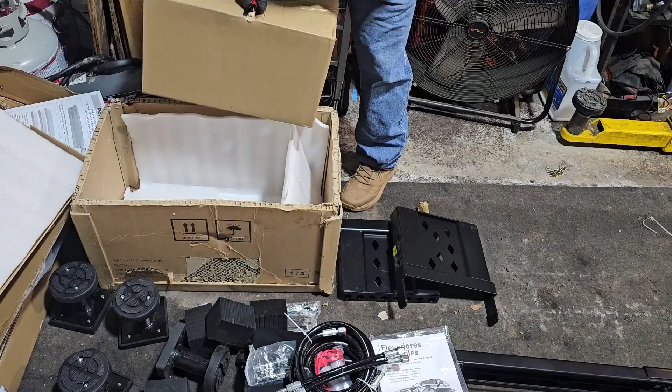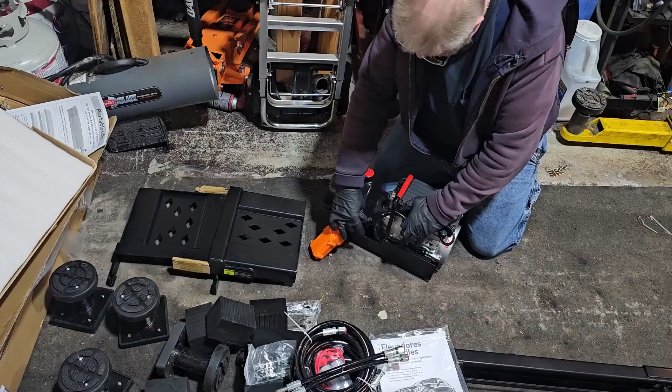So very cool. So this is your pump controller, your hydraulic controller. Looks like that is in there pretty good. So pretty decent cord. So that's basically your up and your down button, and then these are your hydraulic connections here.

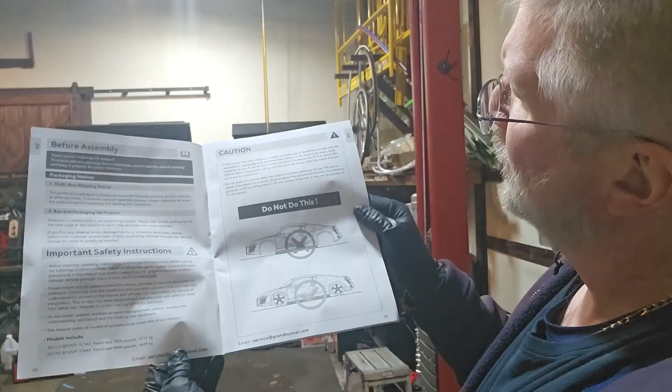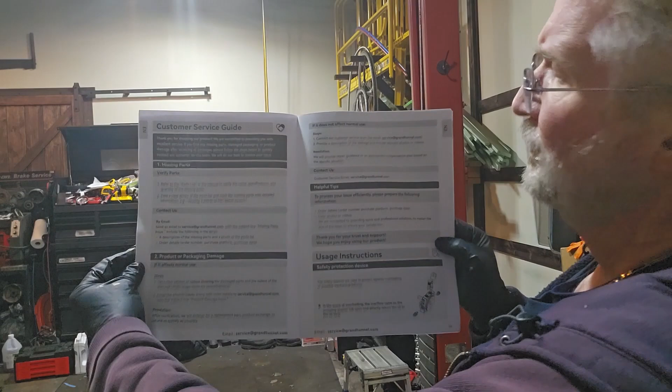And then here's your instruction manual. Okay, so that is your instruction manual. So give you an idea, we go page by page. So safety instructions. Customer service guide, helpful hints.

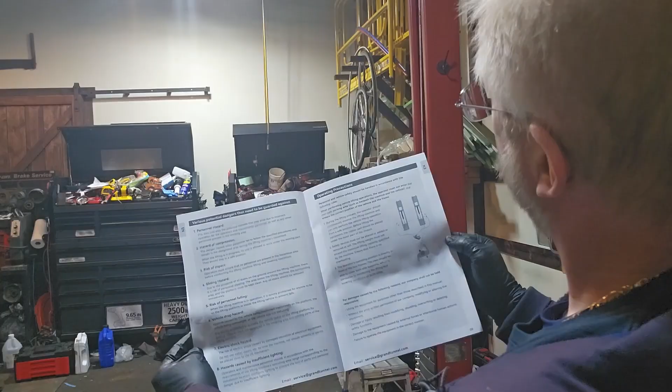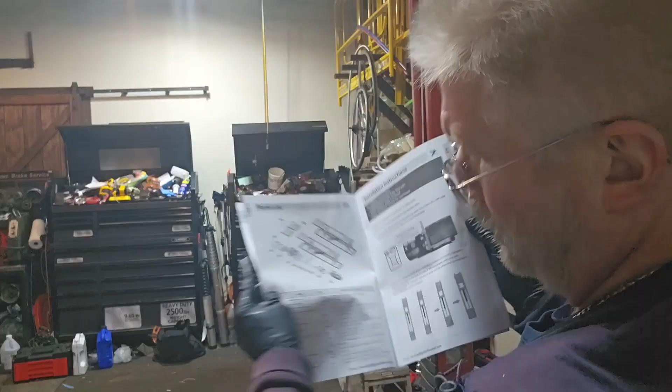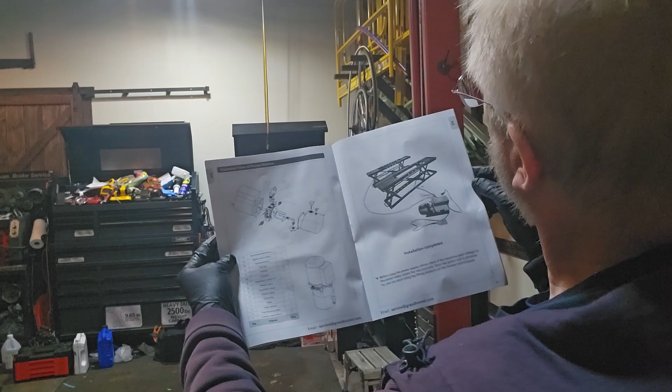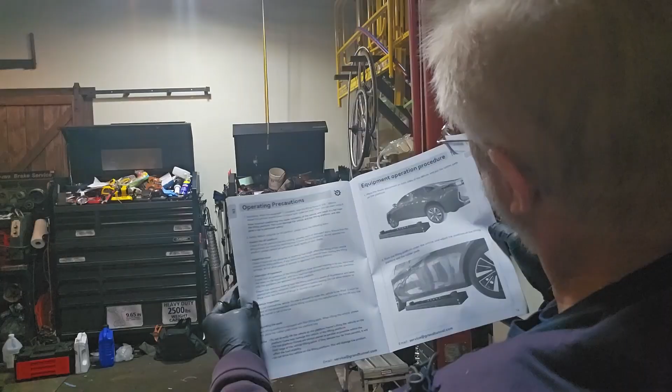Then it kind of gives you quick how-to, operating precautions. Obviously, you want to read through this because there is a lot to this. How to set up the pump, how to set up the hydraulics. So obviously you don't drive the vehicle over these, you position them underneath.

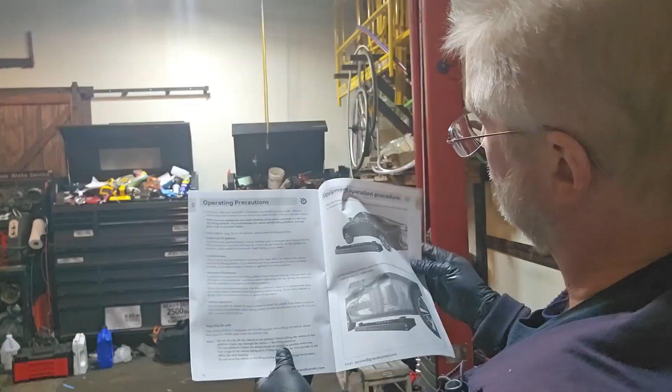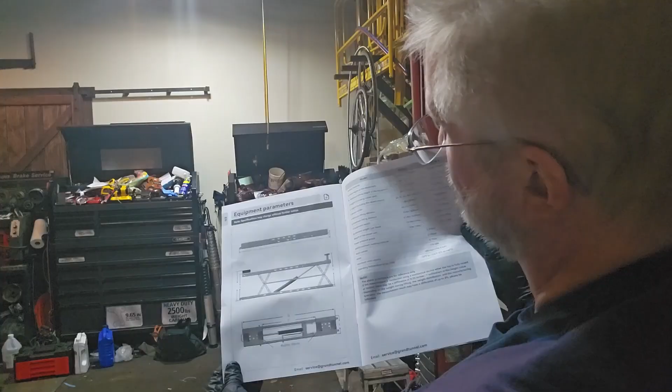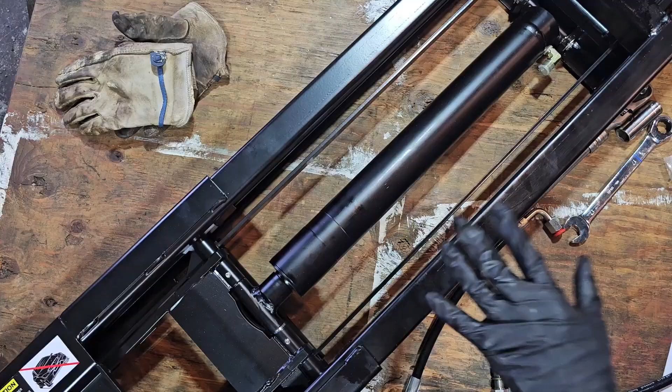So those are your connection points, hooking everything up to the pump. And then basically how that will lift. So there you go. So let's start hooking the hydraulics up. So I put the car lift on my lift table so we can get some better views of this, and hopefully I won't jockey the camera too much by bumping into it, but we shall see.

So you have this hydraulic line. So this will attach to your piston end over here. So hopefully you can kind of see that clearly enough. So what we are doing is we are going to be disconnecting this line and then this line protector on this side. So we're basically going to have that ready to go. And then you're going to need this little pass-through gizmo.

So I put this little washer on. It seems like it comes with 4 washers, so you're going to be looking for all 4 of them. This will only take 2. Oh, and on this end, this bolt is kind of like welded on or fitted on or whatever you want to call it. So basically we're going to take the one washer, put it on like that. Now you have a pass-through hole here. I'll show you at the end what it looks like, but just kind of give you an idea.

And it's kind of tight here because you have this section of the lift in there, but you're going to slide on the other washer, which I'm doing my best to get in there with my fingers as it keeps slipping up my hand. Okay, so that goes in there. Now we're going to basically put this other nut onto this pass-through bolt. And again, they are pass-through bolts, so you don't want to torque them down too tight, but you want to make them snug. So I'm doing this by hand.

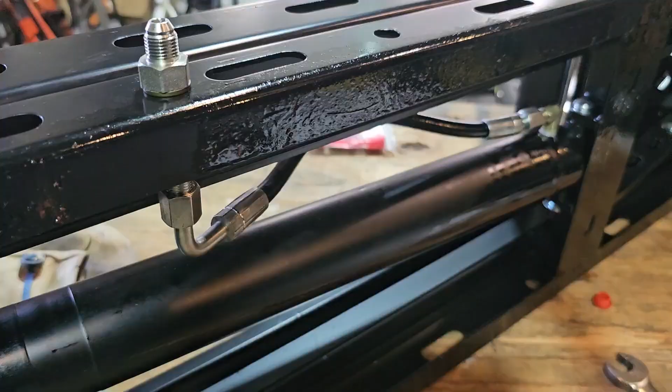Okay, so we can get a little bit better access down here. So we're going to keep this end as straight as we can, so when we're tightening this down, it'll make a good pressure fit. Okay, again, we're going to make it snug and check for leaks, but I think we'll be okay there. Okay, so that's nice and snug there. Let's get this shored up a little bit better in here. Okay, I think we're going to use that.

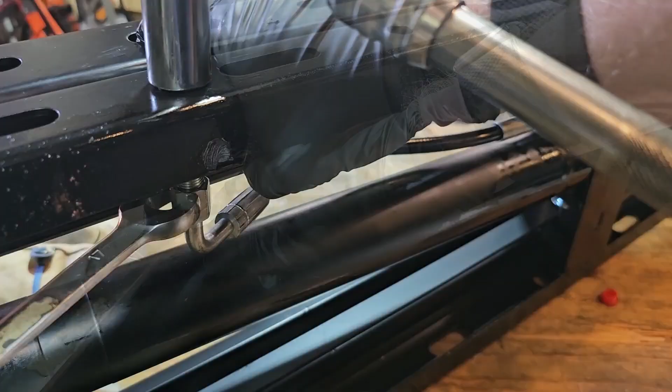And then just kind of get my socket there, my wrist holding that, so we got a nice good fit. Torqued it down pretty good. Okay, so that seems okay. Like I said, we'll test it for leaks once we hook everything up.

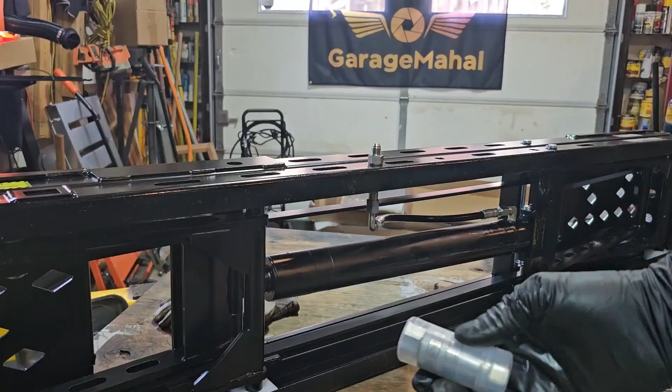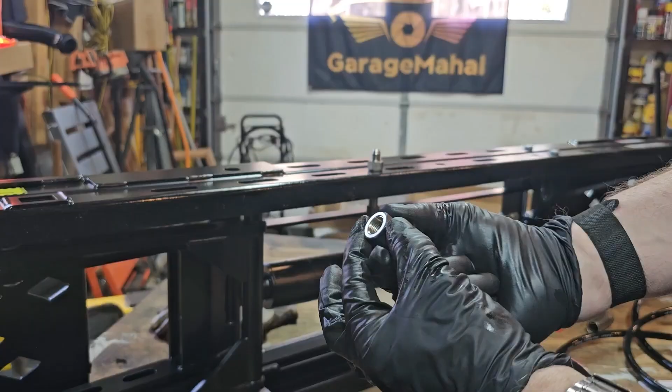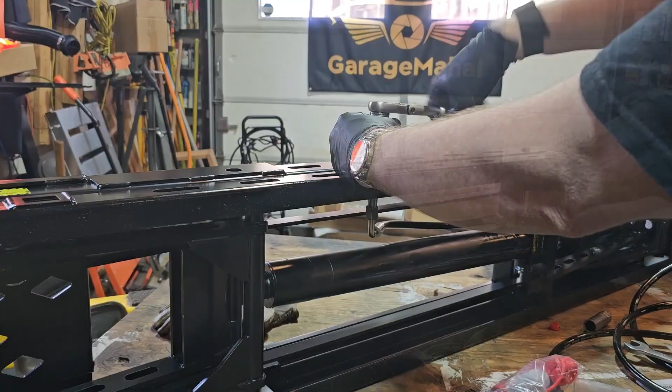Okay, so you get this pack with these quick connects in there, so basically just take them out, and then basically you are popping that piece off, and then this is going to be what screws down on top of here, so make sure you seat it properly. Then it is a 19, so once we have that threaded properly, let's just go ahead and get that set. And then spin off this plastic cap, and then your quick connect goes onto that. Once we find the threads, which way they're going. And there we go.

Tighten this up. Okay. Test that out. That's good fitting. And then these are the protectors for everything. So just kind of slide that up on there, and that'll help keep any fluid from leaking out.

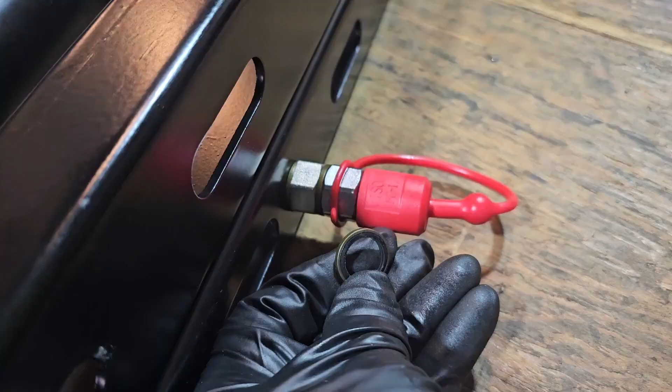Then this side will connect to the motor, and then this cover goes on that to protect that. So you can put your little leash down here, and then there you go. Okay, something I missed initially, but this washer, you want to put it between those two pieces there. So that gives you an idea where that goes.

Okay, next we are going to connect the hydraulic line. So again, if you have everything correct, you should have that washer spacer there. That's all connected. And then basically you are just tightening this down. Okay, and again, make sure it's snug. So we're going to check for leaks once everything is all nice and hooked up, and then we get this top one in. Okay, that should be good.

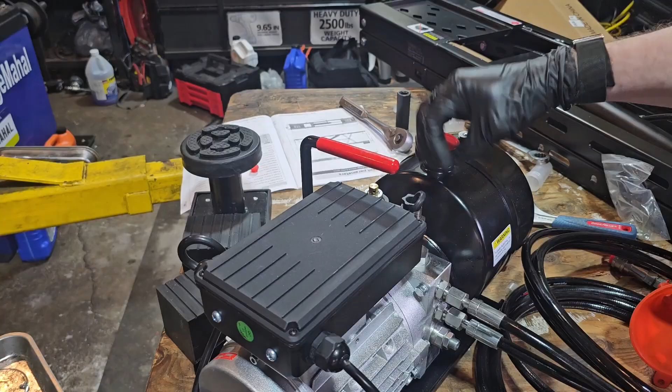And there it says, please inject 4 liters of 46 grade anti-wear hydraulic oil. Okay, so we have some ISO 46, 2 gallons premium anti-wear hydraulic fluid, which basically is required. So you have a dipstick here on the end of this, so it gives you an idea of how full you want to make that. So that looks like that's going to be the full mark right there.

So let's start pouring, and I can visually see in there how much we need to add. So we'll just keep pouring it slow, get a visual on that, and then we go from there. Okay, we're visibly close to the top. So again, we should be, I think, right about there. Okay, hard to see, but we are right at that notch, and we're visibly pretty close to the top. And as I put this down here, I can see I'm right where we should be.

So now we can hook up the hydraulic lines to the lift, see how it works. I'm going to clean up some tools. I'll put them side by side here so we get some better camera angles on it, and then we can go from there. And then we can retest how much we have left to go in the hydraulic compartment after we fill up the pistons and the lines with the hydraulic fluid.

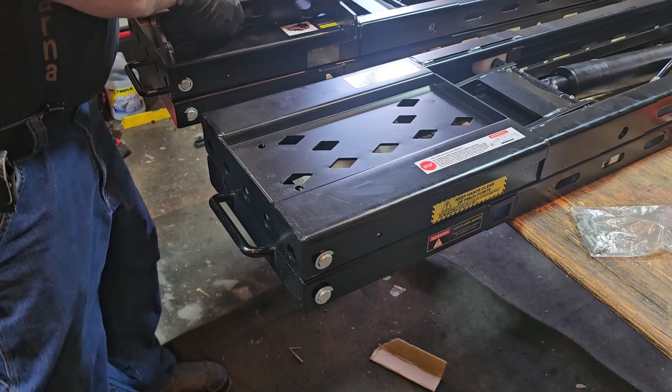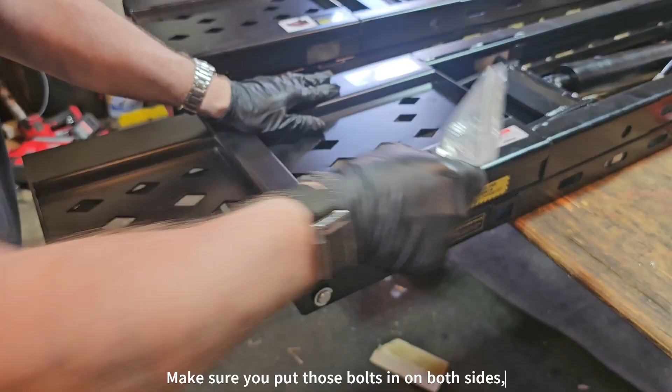Okay, so you get this extension piece, and it only goes on one side because that is where a screw hole is, and basically you're slipping it into place like that, in between that one pivot point and there. And so if you push down on this, this is going to basically grab onto this like a lever. So you put these bolts that come with it in place, and then you have an extension. So if you have a longer frame, like an 8-foot bed on your pickup truck, you can extend and get that up there.

And like I said, it is very rigid. I'm not worried about that being an issue at all. However, I'd probably put this part onto your bedside versus your engine side, just so it's a little bit lighter. But that's just me with a word of caution.

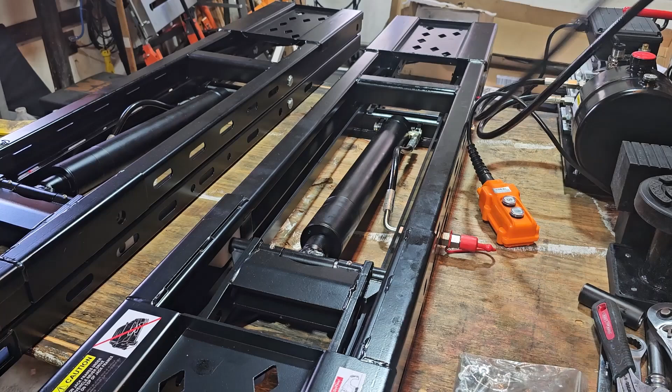Okay, so I have the motor sitting up here, and I'm going to use both hydraulic connections, one on one side, one on the other. So let me just get this one situated. We're going to pull that protective cap off, and then we're going to connect that, make sure you have a good connection there. And then I'm going to slide this hydraulic hose underneath to the other side so we can have a good symmetrical test.

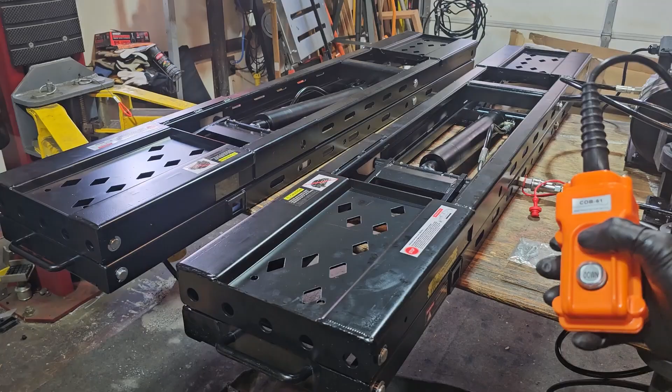Okay, with the controller, I'm going to cautiously get that going, and you can hear it spinning up. So there you go. We're going to get them to full height so everything is filled up.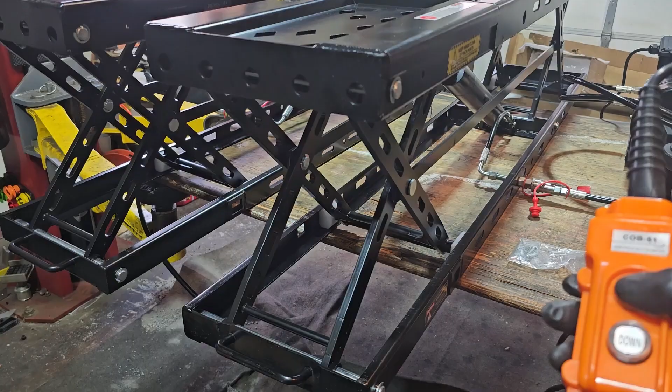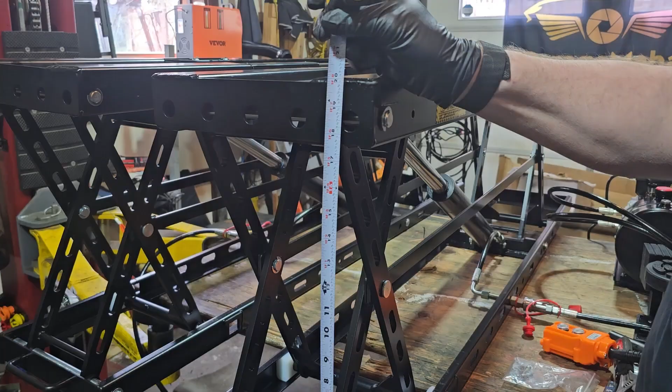And let me re-angle this camera so you can see the full height. Okay, so that is full height. So from the bottom to a flat surface, you're looking at 20 inches in full height just for this. And then when you have the lift pad, you get an overall height of basically about 25.5 inches.

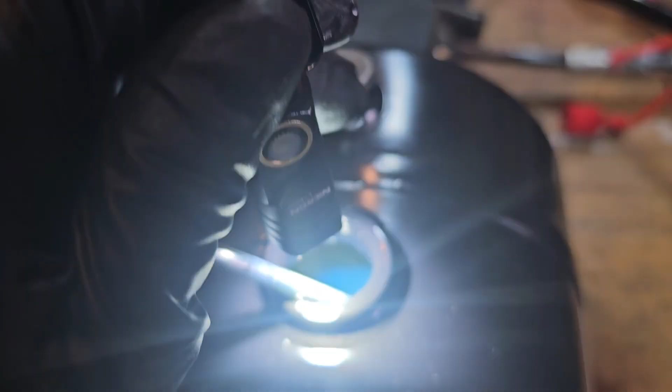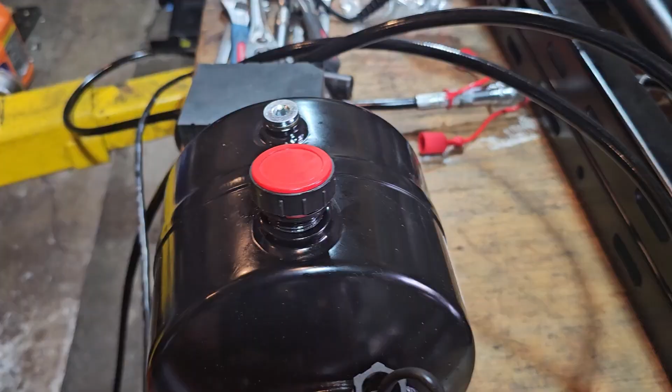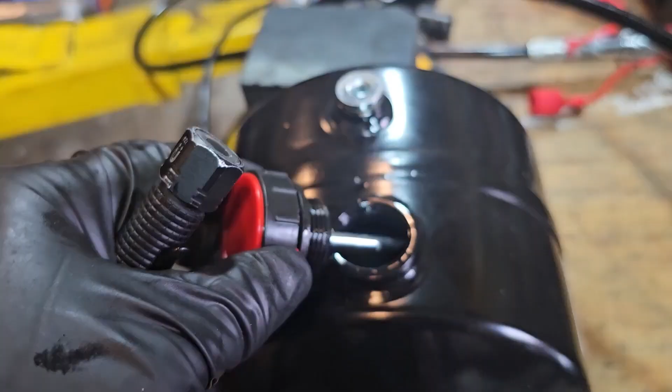So as I alluded to, kind of hard to get a good focus in there, but the hydraulic level did drop a little bit. So that was just basically filling up the pistons and stuff. I'm going to give it one more go. I'm going to level off the hydraulic fluid in here, raise it up one more time in the garage, and then put it back down just to make sure I work all the bubbles out. And obviously you want to test the level when it is in the lowered position, and then we go from there.

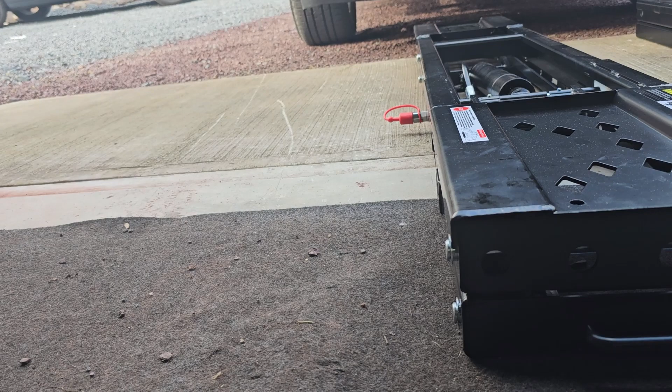Okay, so in the instructions it says explicitly not to drive over these. In my case, because I do have enough clearance underneath to drive over them without any issues, that's what I'm going to do. Otherwise, you'd have to go in from the side and slide them up underneath. Make sure that you clear that connection so you're not running that over, because you'll permanently damage the unit. Definitely have a spotter to make this process a little bit easier. Otherwise you can go from the side and slide them into place underneath the body, and then I'll show you how to set up the connection points from there.

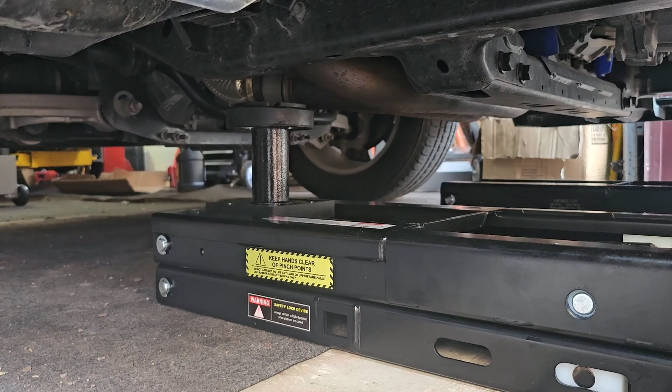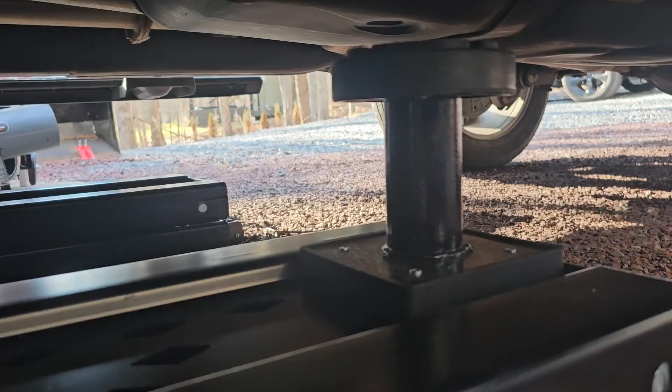Okay, so you can see I got the pad situated towards the front, so the front one's going to absorb the weight of the front of the vehicle, and then down here, that's the frame there. So we've aligned that stop all the way at the end of the lift, so that is going to balance out the back part. If you had the extensions, you could go an extra 6 inches or so, but since I have the less than 6 foot bed, I should be okay here. If you have an 8 foot bed, I'd probably add the extension part, which you'll mount on the front of that. So let me go set up the other side, hook the hydraulics up, and I'll show you how it works.

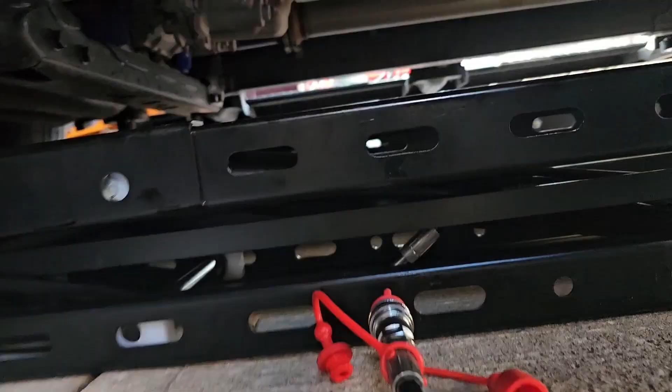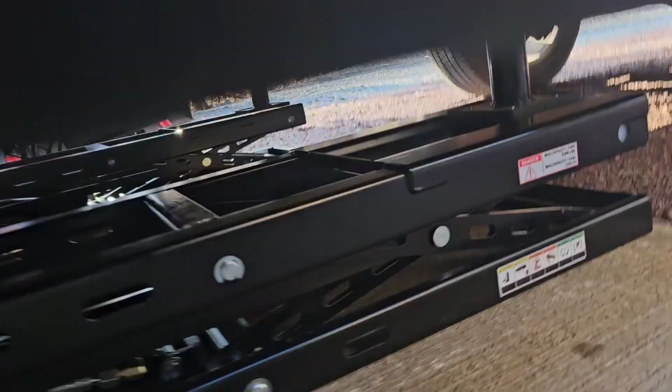Okay, hydraulic lines are hooked up, so we're going to start lifting it, and make sure that we are nice and straight on the frame. As soon as you get a little bit of movement, stop, and check to make sure that you are safe and stable on the frame. That foot looks okay. That one is not connected yet, but it looks like it's going to sit okay. Let's check the other side. Okay, so this one, I'm just going to push that in a little bit so it's good. And we look like we are good on that side. So let's raise it up some more.

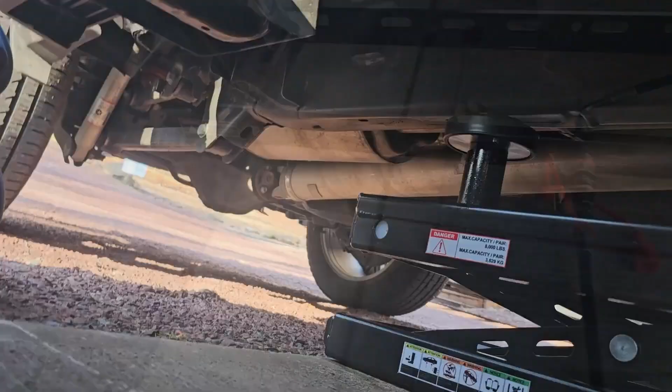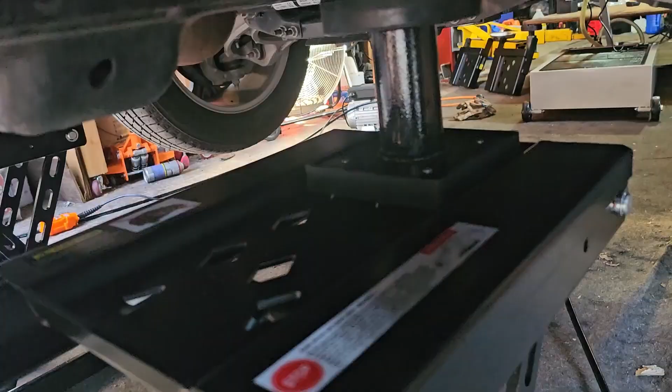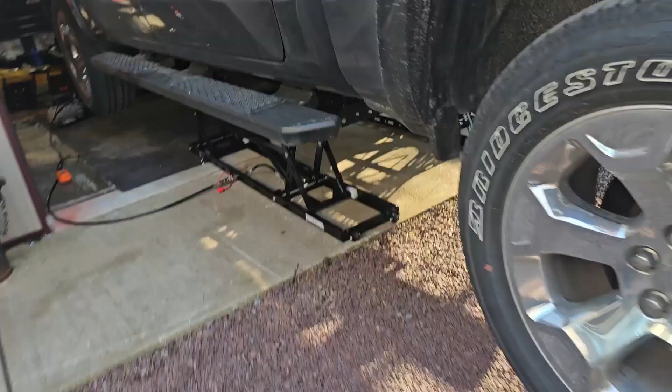Okay, so you have these locking pins, and you want to put them through here, so if the hydraulics start to slip, you have a built-in safety. And then there's one on the other side. Okay, so this is the other lock on that side. So now we're good. Now you want to make sure that you don't have any wobble or anywhere it's not laying flat on that plate. You got to make sure that that foot is nice and stable on there. So we look good, frame looks good. Now we can get to work on an oil change, tire rotation, and everything else. Very cool, very stable, very nice.

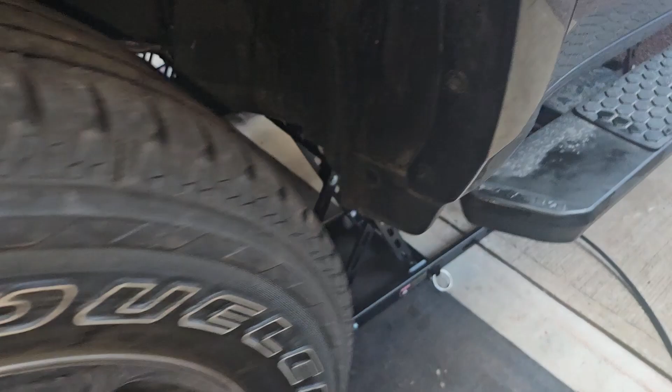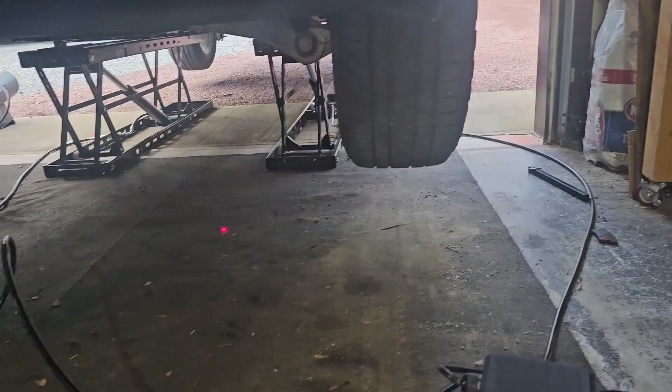Okay, so our maintenance is complete. We are going to go down and remove the locks. So that's on that side, and then we remove this lock. Now that we're all done, make sure the hydraulic lines are cleared so they're not going to get crushed by any tires. And we basically hit the down button, and it'll slowly work its way down. A little bit faster now since you got some weight on it. And we're almost done. You can see the last bit down. And we're done. So now we can disconnect the hydraulics and pack everything away.